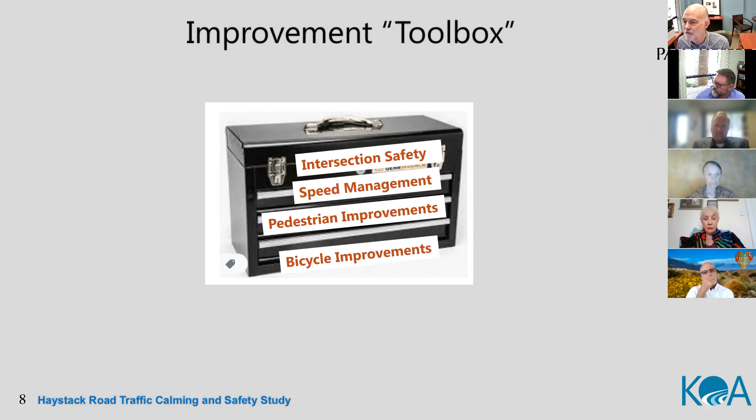In response to what you told us and what we confirmed, we assembled a toolbox of potential strategies to improve intersection safety, manage speeds, and provide improvements for pedestrians and bicycles. We identified 6 tools that could be applied to improve safety at the Haystack intersections.

Those include installing all-way stop control at intersections, installing stop signs with LED flashing borders, adding advisory speed placards to crossroad and side road warning signs, trimming vegetation that interferes with corner sight distance, providing intersection street lights, and constructing one or more roundabouts, which reduce speeds, reduce accident severity, provide equal access for cross-street traffic, provide safer street crossings for pedestrians, and maintain traffic flow on Haystack.

We identified 4 tools for speed management: placing speed limit markings on the pavement next to speed limit signs, constructing speed cushions in the roadway, which are gentler forms of speed humps, narrowing lanes with striping or by physically narrowing the street, and installing radar speed feedback signs, which is already in progress.

Pedestrian improvement tools include installing enhanced crosswalk markings, constructing sidewalks, constructing raised crosswalks, installing rectangular rapid flashing beacons or RRFBs with crosswalks, and constructing corner bulb-outs to reduce pedestrian exposure distances across intersections.

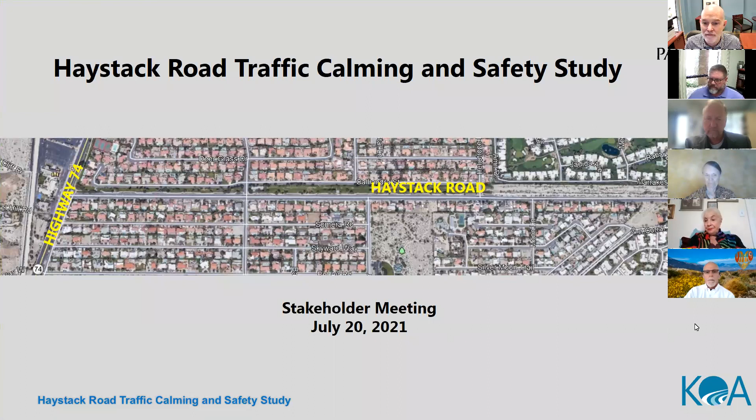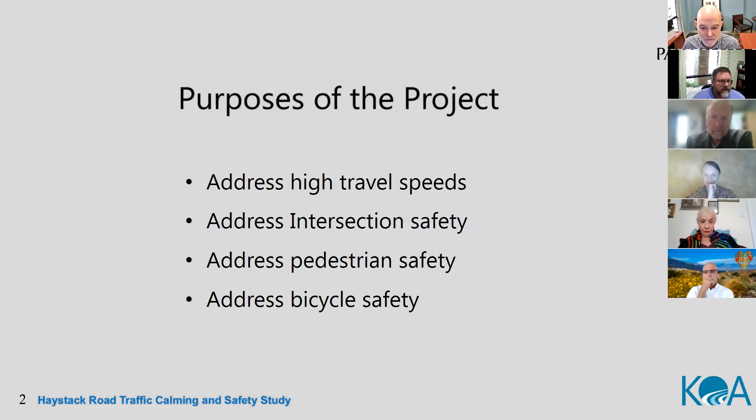You can take yourself off mute, or if you would prefer to type a question in the chat box, we can do that. Thomas, you'll help keep tabs on the chat box for us. I'd like to open it up to the group for any questions or comments on what has been presented, and I can flip to the appropriate slide to help with your question or comments.

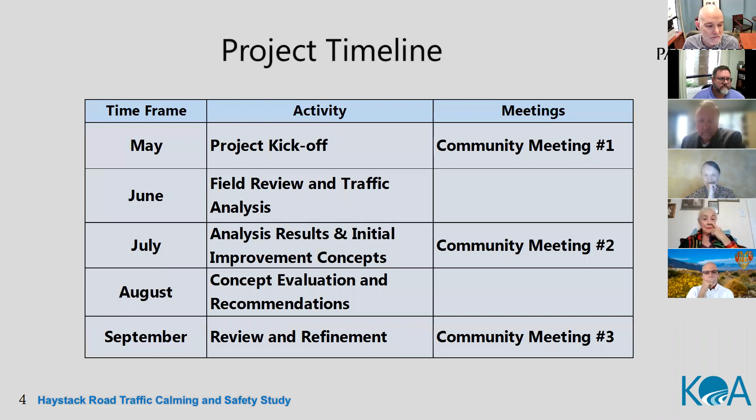We have an initial question: can the speed limit be lowered? Is that one of our options? Sure, that's a very fair question.

That was asked at the first meeting. Presently, the state of California prescribes how agencies manage the posted speed limit on roadways. The posted speed limits are based on gathering data along the roadway and taking a certain percentage of the 85th percentile of those recorded speeds. As Charlie mentioned in the slideshow presentation, the city's recent engineering speed study conducted last year indicated that the existing speed limit of 45 was valid and remained as such.

So what we're talking about with the potential improvement to the roadway is creating friction for motorists to actually slow them down. That's some of those traffic calming elements Charlie presented in his PowerPoint. So is it possible to lower speeds? Yes. How you do it is what we're craving your feedback on as we discuss the potential tools in the toolbox. So, hey Randy, I'm going to prime the pump.

John Curran always has a thought. So let's make him share his thoughts and that'll get us going. Thank you, Mayor, very much.

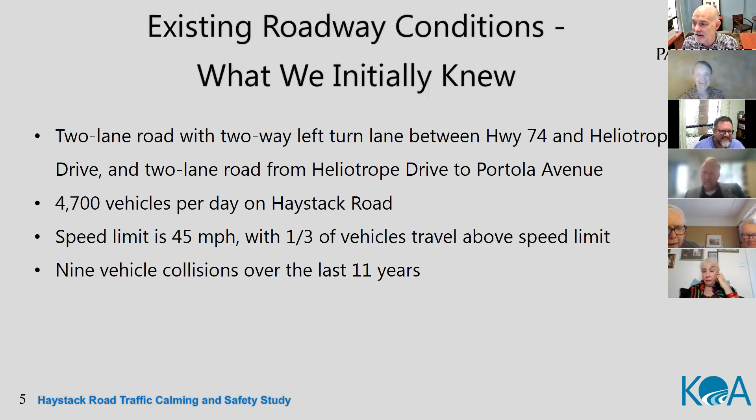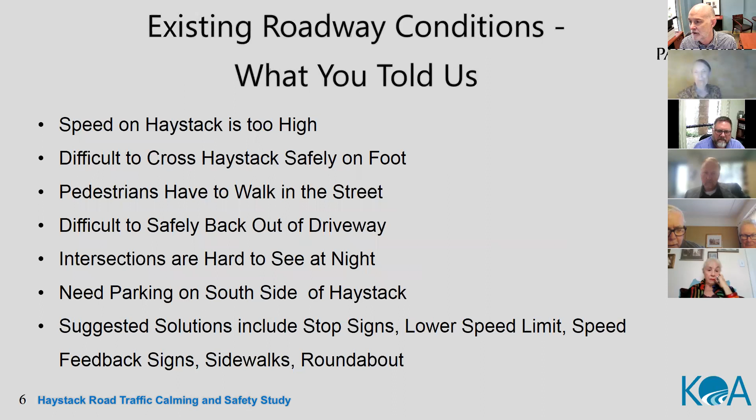Well, unfortunately we got here a little late. We're in Stockton, California, and we missed the whole beginning. So I will need to actually look at that proposal again. But anything we can do to reduce the amount of high-speed traffic will be a blessing and a boon, especially at night. I mean, there's a noise at night.

I'm sorry, John, you're breaking up. It doesn't bother pedestrians because there aren't any, but it wakes people up at night. I'm sorry? You were breaking up a little bit, John, but I think we're following. I was breaking up? Yeah. Okay, anyway, I can't talk intelligently about the proposals, so I request permission to hold my fire until I see them.

No problem, but thank you to Mayor Kelly for thinking of me. No problem, John. The presentation is pre-recorded, and we will be posting that to the project website later this week, so you'll be able to view it in its entirety. We're also going to be posting a survey to help prompt your feedback on the website.

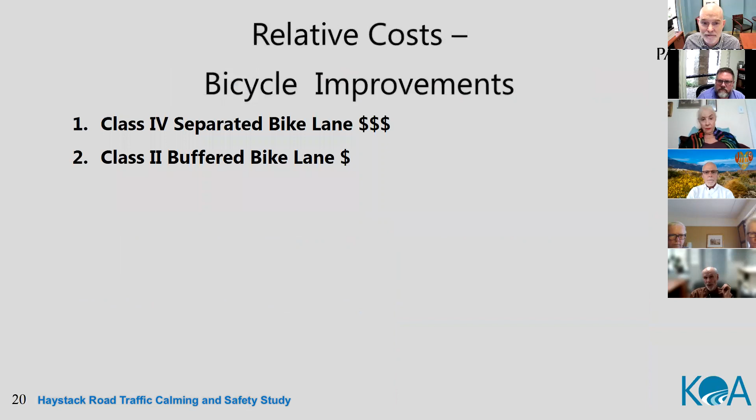And hence, we included the all-way stop signs in the toolbox because of the sight distance. Now, give just the briefest of overview of what must you address when you look at a multi-way stop, because I think this is an opportunity for us to be reminded about, do we just put them in anywhere we want to, or are we guided? Are there rules we have to follow about stop signs?

Yes, the California Manual on Uniform Traffic Control Devices has had very strict warrants on when you could put in multi-way stops, because stop signs, if they're not warranted, tend to be ignored, just like speed limit signs. People will ignore speed limit signs. If the road says drive fast, they will drive fast. And if motorists perceive, why am I stopping here, there's no traffic, they tend to run stop signs.

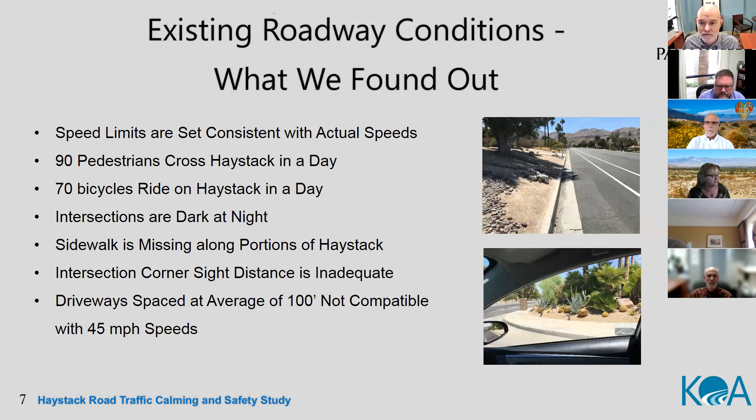So let's talk about the tools in our toolbox, Charlie, that can improve safety for folks entering or leaving the roadway from their driveways. Randy, would you go to the typical sections?

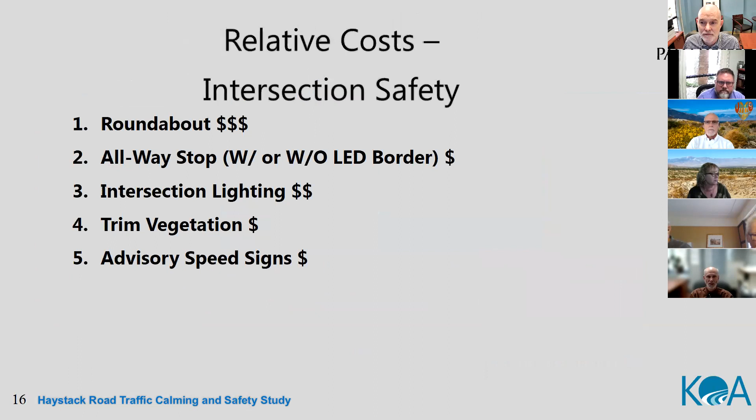If you're driving next to a parked car in an 11-foot lane, you're going to tend to slow down and shy towards the middle. So I think that's really the key. It also gives, when you put in the 5-foot sidewalk, particularly west of Alamo, more sight distance as you're backing out of the driveway. If the back end of your car is near where the parked car is, you're more where people can see you, and you'll be able to see up the road better. So the real key is slowing people down by physically narrowing the roadway.

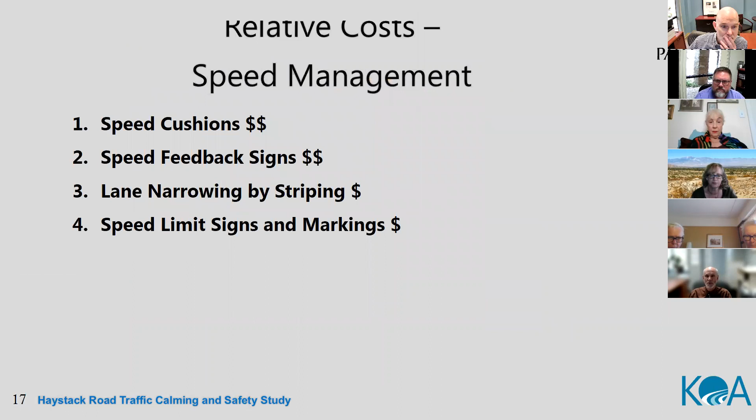When you have a mid-block crosswalk, it's oftentimes unexpected. Whereas if you have a crosswalk at an intersection, particularly with a stop sign, people are going to expect that they have to stop.

It's a fairly long section, but you do have three intersections coming from the south and two intersections coming from the north. So there is potential to have

And I've personally been there and pressed the button and about been run over just trying to step out in front of cars, because even though it's very bright, they're thinking, hey, I'm driving 40, 45 miles an hour, I don't want to stop for you. So I think that's the risk in putting something in mid-block.

I don't know, Randy, if you have more to add to that. Yeah, thank you. I know at our last community meeting that somebody brought up the mid-block crosswalks that we installed with the demonstration project on El Paseo.

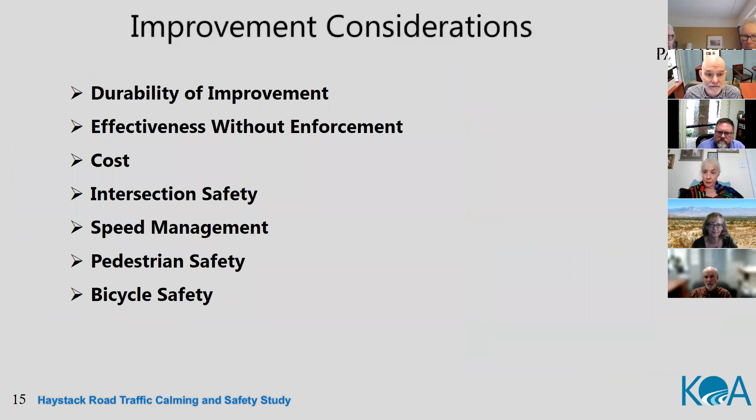Charlie, why don't you help respond to that point? Well, that's a true statement, and I drive on streets frequently where there are parked vehicles and people getting in and out, and it's scary for me as a driver, particularly if it's dark and someone steps out. And I tend to drive those streets hugging the center turn lane as a result. I don't know that all drivers do that. Some people, I think, probably put on blinders, but I think that's a very valid point and a concern.

Thanks, Charlie. John, you had your hand raised? This is Jan, it was actually my hand. I'm really liking a lot of the ideas that you're sharing with us today. Some really good-looking options that can help us up here a whole lot. My put-you-on-the-spot question is, how quick can we get this stuff?

Sure, that's always a fair question. So as we've demonstrated, ordering and installing speed feedback signs is something that is relatively easy. The tool tends to be something that vendors have in stock, and it doesn't require a whole lot of field coordination. They have to make sure when they install a post, they don't punch through a water line or a gas line or something that's underground. But it was something that was fairly easy for us to install.

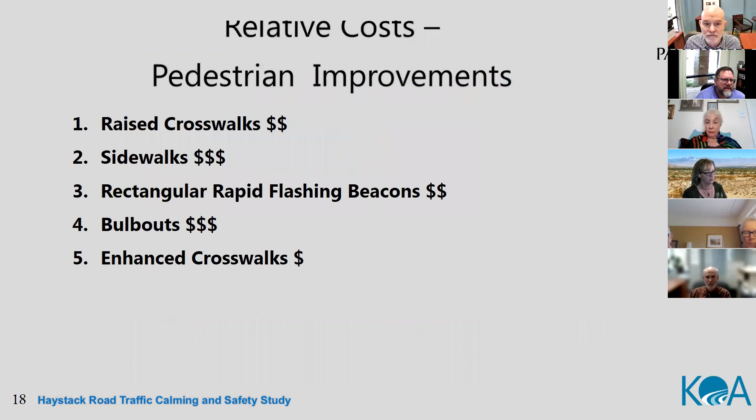So in our experience with calming traffic and improving safety of roadways, I'm talking as I'm going backwards.

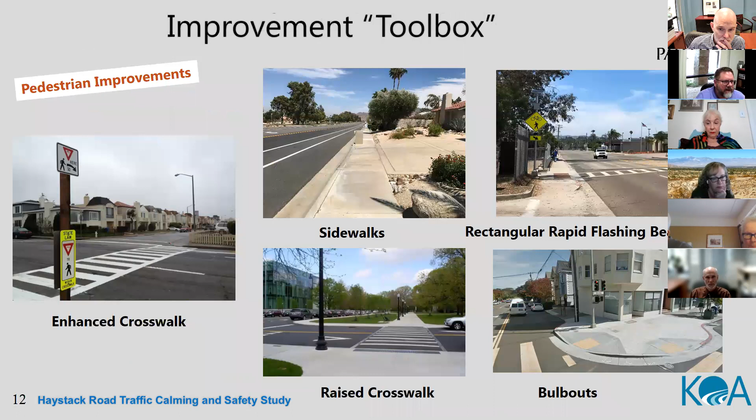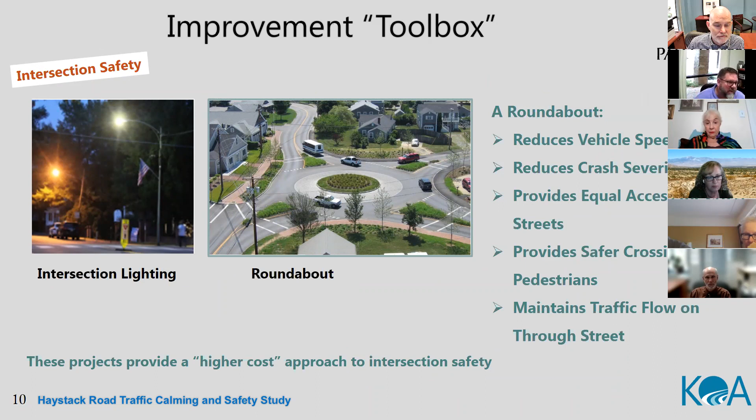Some of these tools are less complex, less expensive, don't require as much design effort, and don't have to worry as much about underground utility conflicts. Some of them are easier to do than others. Speed cushions, speed limit sign markings, and lane narrowing are all fairly simple and straightforward to implement. A roundabout is probably the most complex tool in our toolbox today because of the major design effort and construction involved. You have to think about drainage so you don't have water ponding, all these things that make it a more complex tool to install.

In a typical approach to working to reduce speeds and improve safety, communities tend to adopt an iterative approach. What's the low-hanging fruit? What are the near-term improvements that could be done, either because they're simpler to build or they're more bang for the buck to install, while the community considers more complex, longer-term solutions.

So when we come back to you in September, I think we're going to give you a better sense of a recommended approach to address these four issues on the roadway: calming traffic, reducing speeds, improving intersection safety, and addressing pedestrian and bicycle safety and accommodation. We'll give you a sense of not just the dollar signs like you see on Airbnb or OpenTable, but also what is easier or sooner to construct.

That said, once we get feedback from the community, our next step is to go to City Council, present the results of this study effort, and ask for their direction, and also discuss the budget for the improvements. I wouldn't be surprised if there's an approach of near-term improvements versus longer-term improvements. I think the size of the dollars and the speed at which these things could be installed, I hope to give some insights to the community when we come back to you in 60 days' time.

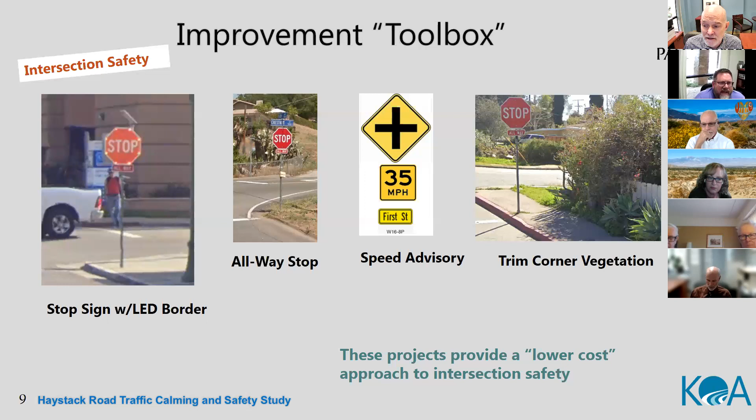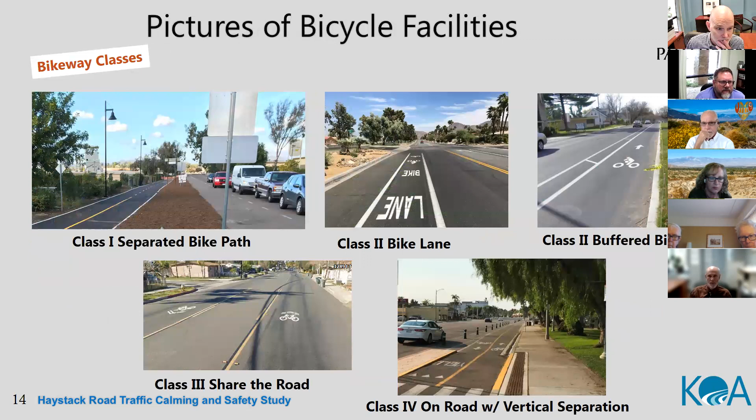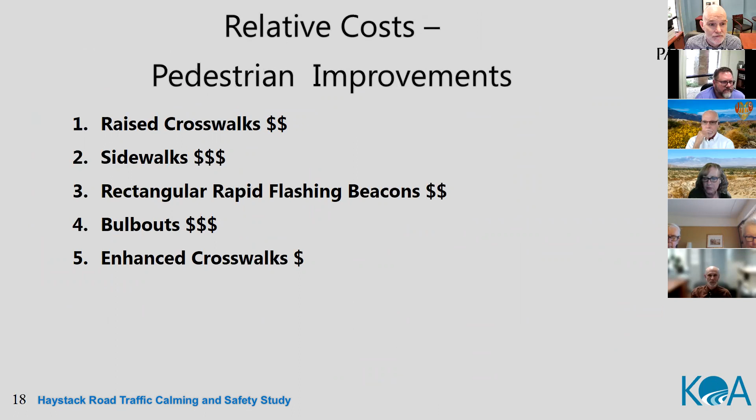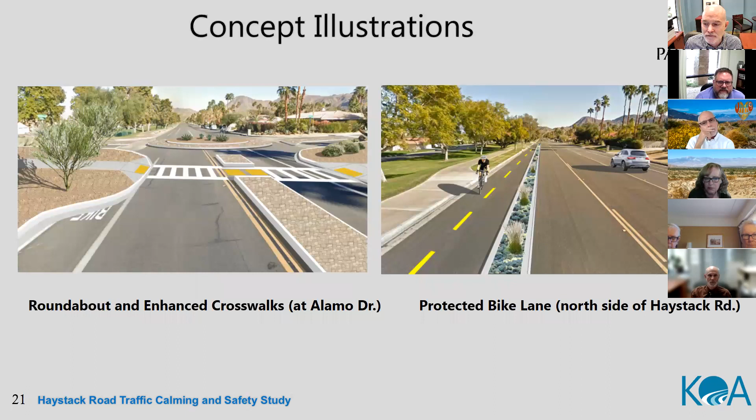That certainly is a fair question to ask. Charlie, when we were discussing potential changes to the roadway cross section, the perceived benefit of adding a sidewalk to the south side was certainly absorbing the existing real estate and narrowing the footprint of the roadway to narrow those lanes and get motorists to drive more slowly. But why don't we talk about the pros and cons that your team sees about the prospects of a sidewalk along the south side of the roadway, particularly given the input we're hearing today at the meeting.

A sidewalk on the south side of the roadway primarily benefits the people who live on Haystack, because if you live mid-block somewhere and you come out of your door and want to walk on the north side in the shade, you kind of look both ways, walk to the middle and hope no one pulls into the center lane, then look the other way again and continue to get over to the north side.

The advantage of the sidewalk is that you can go down to a controlled crosswalk. As part of your walk, you walk along the south side of Haystack, go to a controlled intersection, cross on the crosswalk that's designated there, and then can continue in the park with the shade. I see that as really the major benefit, apart from narrowing the roadway, is that it provides access. Now, some of the section already has a sidewalk, so that's already in place. But I recall one of the comments from the first meeting was someone mentioned they have to walk in the roadway unless they try to troop through people's yards and landscaping, to get to a place where they can cross safely.

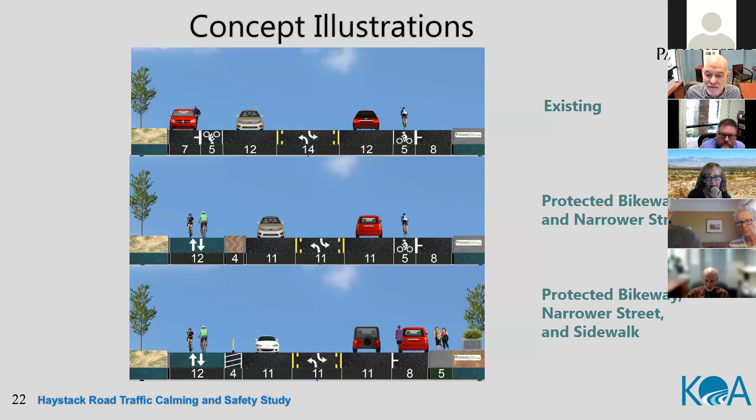The only comment I wanted to make is when we were looking at some of the diagrams for the 3-way and 4-way stops, for the people who live right on those corners with those stops, it's going to be negative for them because cars tend to accelerate really quickly and it will become noisier, and of course less desirable for them. So I know it's a smaller subset of people, but if you're right on one of those corners of Chia or Alamo and people are stopping right in front of your house and then taking off, that's going to have a negative impact for those folks.

Thomas, thank you very much for your input on that. Yes, you may hear some more engine noise. I think you have to balance that out against the potential gains from that kind of tool to promote safer crossings for the neighborhood too. But that's a valid concern, and Charlie has taken notes, and we'll certainly factor that into what we bring back to the community in about 60 days' time.